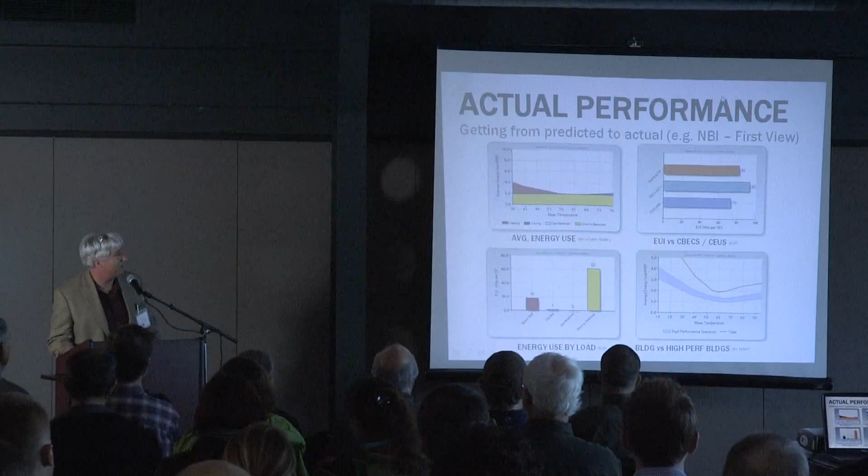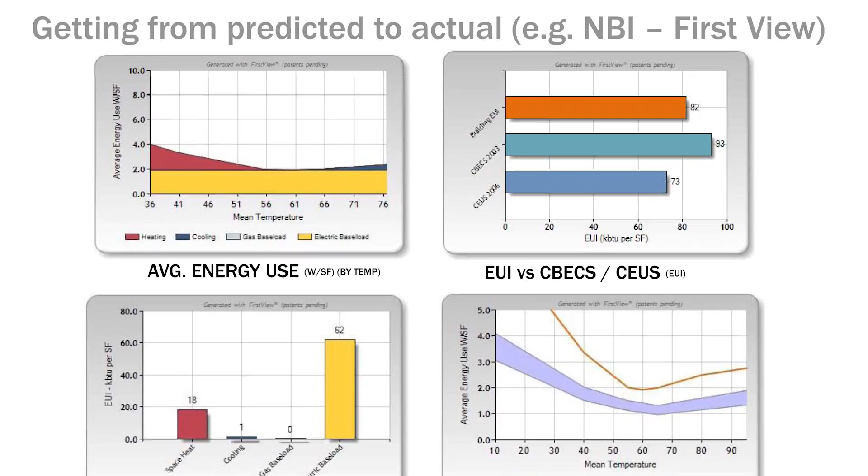But I will have a few slides about buildings today, only at the beginning, and then the rest will be about district systems. But I think much of what Margaret teed up has huge implications for our neighborhoods and our cities. And it all comes down to this, especially for the architects and the engineers, but actually for everyone that Mark had hands raised in the room. Actual performance is where things are going.

So there's a thing, but we really want to focus on this because to date, this isn't the way our codes are built. This isn't the way we're taught to design. We're not an outcome-based society yet. And yet this is actually what net zero performance and actual performance is.

The Living Building Challenge is an outcome-based green building standard. You don't even get to submit until you've demonstrated the building's actually performing the way you want it to. I want to make sure that the contractors, owners, engineers, and architects in the room are thinking about what will it mean 1 or 2 or 3 code cycles from now when the building codes are requiring us to demonstrate actual performance of our buildings.

That's where we're going. The draft codes are already written. I was just in DC a couple weeks ago working on a policy summit about how to make this happen. I want to make sure people leave here today realizing this is not a fanciful thing. Outcome-based codes is where things are going.

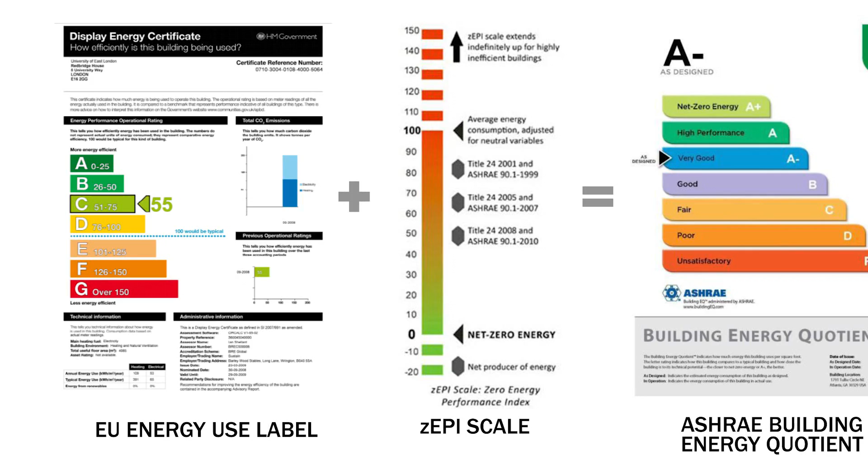There are systems out there. The one on the left is the European system about reporting building energy use. The one in the middle is NBI's zEPI scale. And the one on the right is ASHRAE's proposal, which I'm not going to give them a big grade for creativity, but it does look an awful lot like the European one.

These things are coming, and we're already starting to use them in those 5 cities, and now maybe 10 cities.

I'm only going to briefly talk about our living building project because Margaret did such a good job teeing things up, but there are some things we learned here that have real district scale and city scale implications. This is the living building project our firm's been working on in Portland for the last 4 years, which, unlike the Bullitt Center, is not going to be built. We found out through political chaos in Portland, it's officially dead. But that doesn't mean we didn't learn a lot working on it.

One interesting thing, which Margaret touched on, is the notion of dashboards. But what we're envisioning, which really moves to district scale, is the notion of fractal dashboards. We're going to need dashboards at city scale, so if you're driving by the building or on the web, anyone can find out how the buildings are doing against their goals. But as you walk into these buildings, you're going to want to know a lot more, and we're hoping to engage you a lot more.

This will be true at the Bullitt Center, where the building lobby will be a host of information for people. But remember, one of the key things Margaret talked about was that tenants have an energy budget and a water budget. Imagine what that lease looks like. Think about that. So you're going to want to walk into work and say, how are we doing?

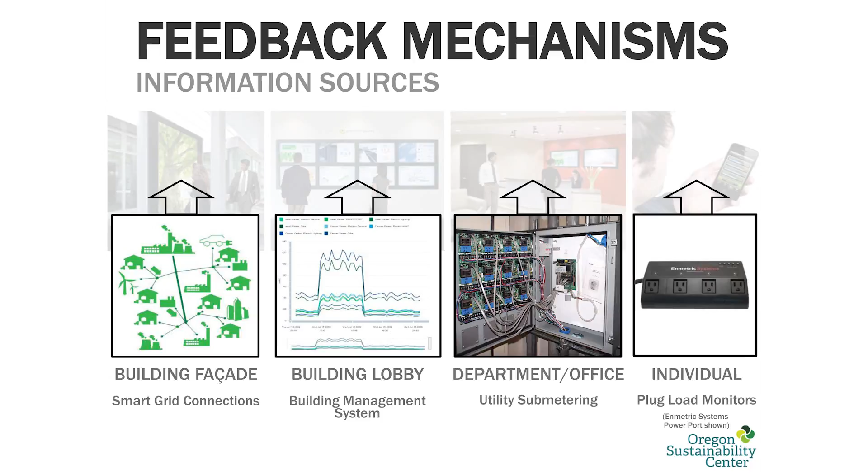Ultimately, we've got to get people engaged personally. The technology exists to do all of this; it just hasn't all been put together in a tidy way inside one building before. So we all owe a debt of gratitude to the Bullitt Foundation, Miller Hull, and PAE for the work they're doing. It is really, really groundbreaking.

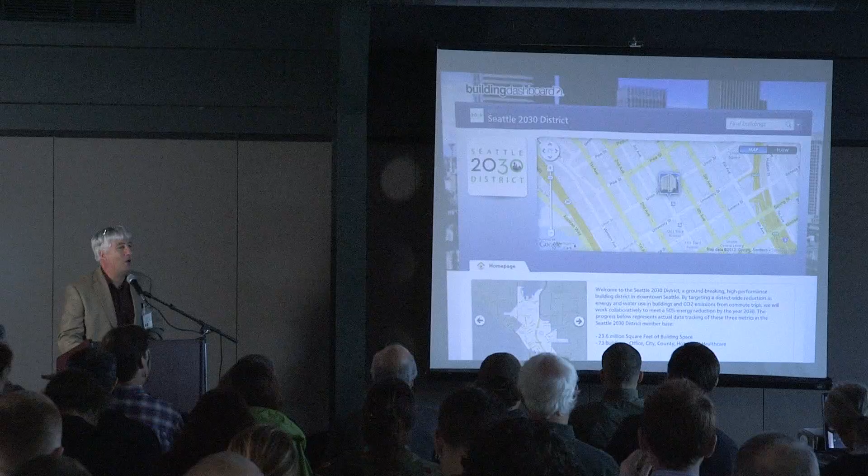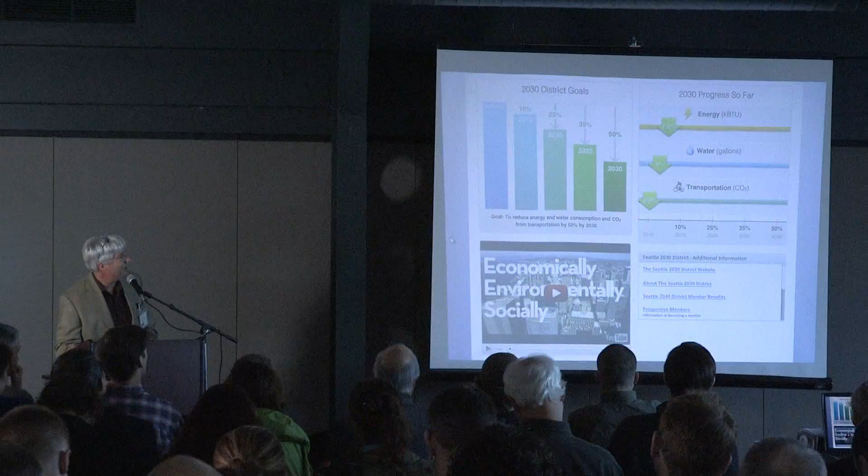So now let's move to district. The notion of an outcome-based district already exists, up in Seattle at the 2030 district. Some people think it's such a good idea that there are now 3 or 4 of these 2030 districts cropping up around the country. It's a whole group of businesses banding together and setting goals. The 2030 district wants to be 50% less carbon, less energy use, by the year 2030, I believe. And they've already got a website reporting how they're actually doing. I want to make sure everyone's aware, because I don't think the AIA is telling us this, and I don't think the code people are telling us this, that we're actually heading to this outcome-based world. So use that as a framework for the rest of my talk.

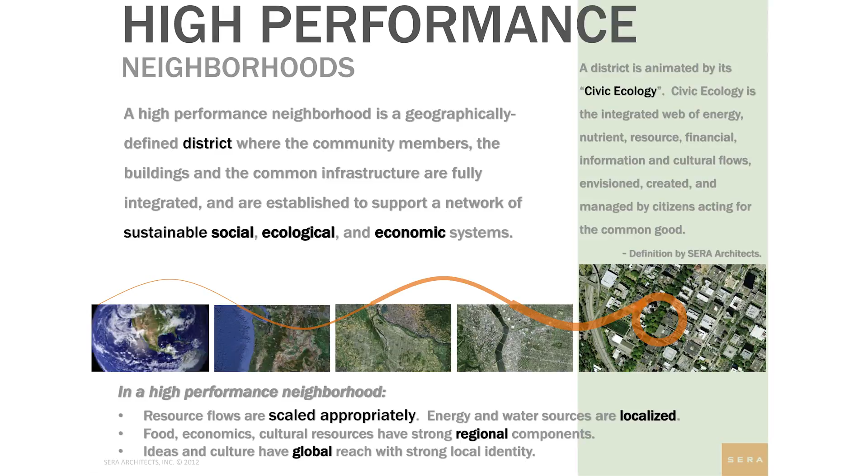Now I want to talk about high-performance neighborhoods, sometimes called eco-districts — we use those phrases interchangeably. It's important to note there's growing focus on our cities just in the last couple of years. The population in urban areas in America is now larger than the population in rural areas, and that hasn't been true since 1910. So it's a big, important trend. It's all about scale and resource flows — you're going to hear me talk about this over and over today — and regional components, getting a regional mentality, regional economies. There's a whole bunch of issues around regional economies tied to this, but it's still going to have a big global impact.

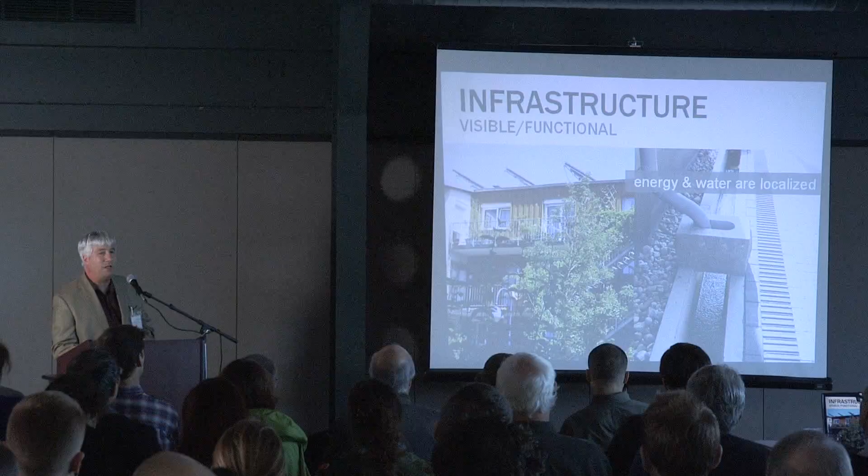I'm first going to do a review of some so-called eco-districts or high-performance neighborhoods that already exist. Unfortunately, all of the ones I'm going to show are outside the United States, but that's just the way things are — we're really close to starting to get some. This is Malmo, Sweden, pretty famous for a brand new district with all sorts of interesting things going on. I think what's quite interesting about district scale is that we're going to start to celebrate things we've been hiding for a long time. I actually got to speak at the Civil Engineering School at University of Washington earlier this year, and I was trying to convince both the faculty and the students that infrastructure is going to become sexy.

Mark my words, you heard it here. It's true, and it already is. We've been so busy trying to hide things and make things go away that we aren't celebrating things that are actually part of our place. Energy and water infrastructures are going to become more visible. We're going to get back to creating neighborhoods that really feel human scale.

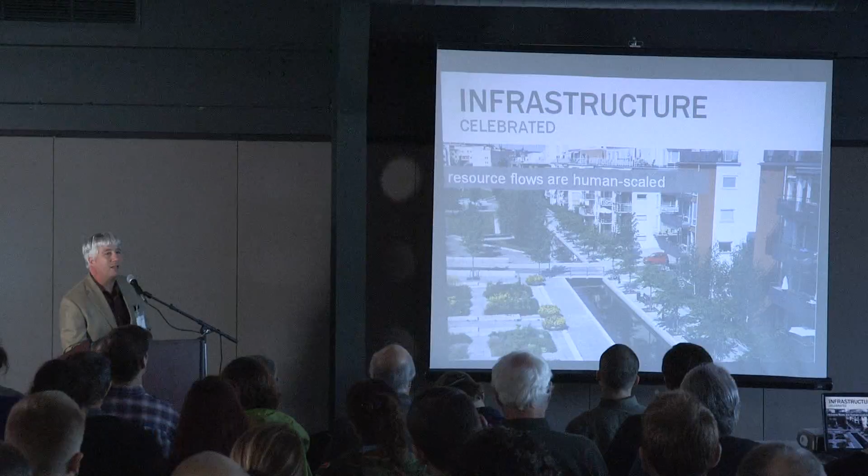We're going to get a lot better at mobility and mixed modal things, so it isn't all a car culture. This is already happening. I was just reading an article in Architectural Record about Oklahoma City completely reinventing their downtown transportation system. They're taking out all the one-way streets and turning them into two-way streets, and doing a number of things around this.

We're going to be remaking the urban, but we're also going to be remaking suburban infrastructure. So I think the remaking of suburbia is a huge job opportunity for a lot of people in the room, so just pay attention to that.

So let's also now go to Stockholm. Stockholm has Hammarby Sjöstad, and I've actually gotten to tour both of these places. Very interesting—this is much older, it's been there about 11 years. Now it's a very vibrant neighborhood, very, very successful.

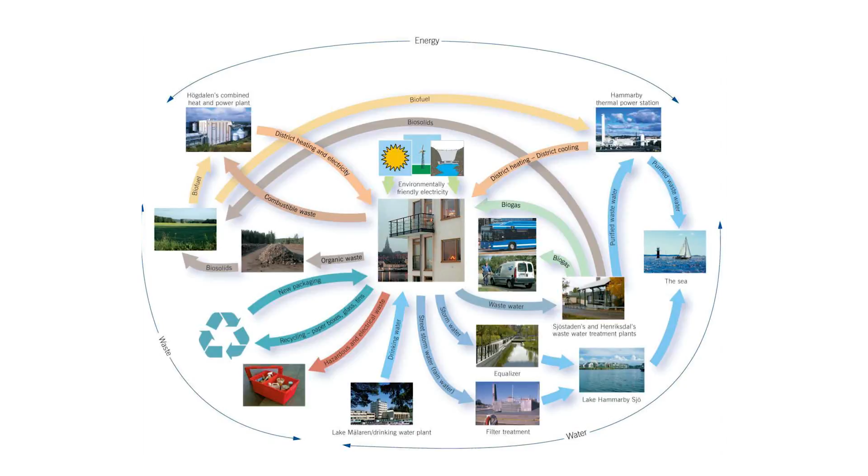This is their flow map of all the resources in and out of their community, and I think this is something we're going to see more and more of. What we want to do is start to close loops. If you think about most of our systems right now, they're one way in, one way out, whether you're talking about energy, water, or waste. If you were to draw the flow map for most cities right now, it's just lines of resources in, and lines of waste resources out. We're going to start closing all these loops.

In fact, I think there are even discussions of things like that here in Bellingham. But still getting this mouse figured out.

So one of the things they've done in Hammarby is close the waste system. They actually have a vacuum waste system that exists as infrastructure underneath the entire community. These are for different things—glass, plastics, organics, and so-called waste, whatever's left over. But it's all getting vacuum tubed to a central location, as you can see here.

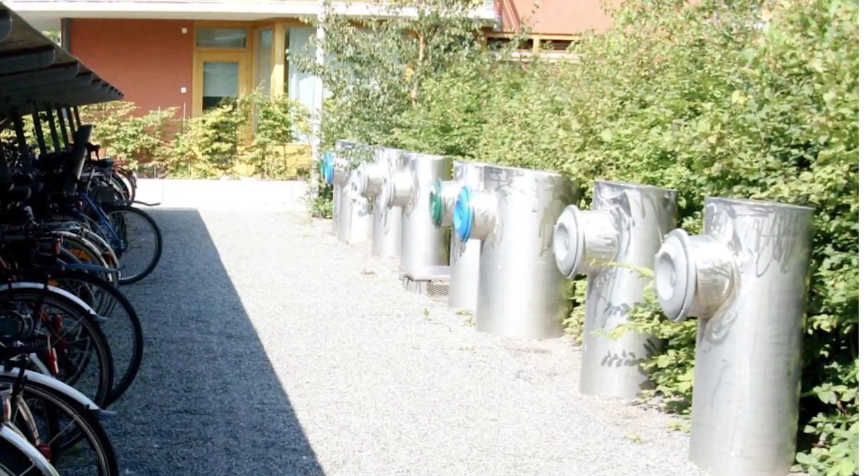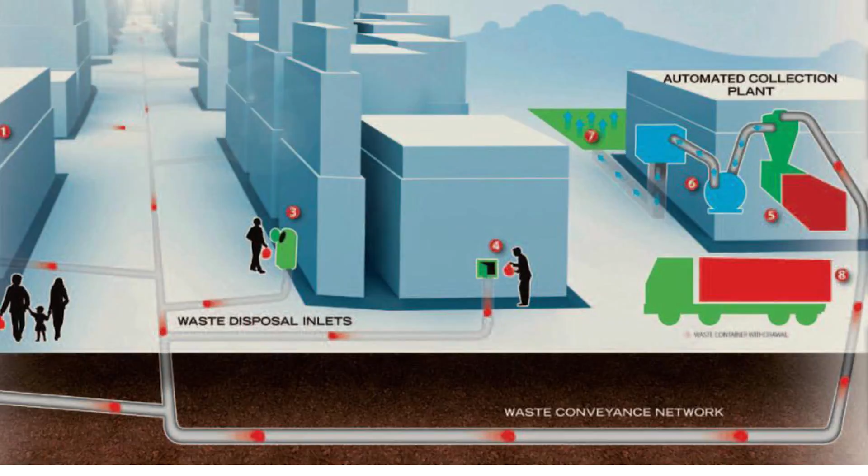I think we're still some years away in America from getting to this level of infrastructure, even though I am working on a project in the United States where we may be doing vacuum organics only. It's a much smaller, easier infrastructure to install, and there's a lot of real easy upside benefits that come out of that. But in Europe, it's not quite commonplace, but it's in many, many cities.

So one of the things it gets you to do is really start to optimize waste-to-energy systems. This is a waste-to-energy plant just outside Stockholm—and when I say just outside, I mean like 2 miles outside downtown Stockholm. This has not been pushed out to the periphery, it's not been hidden away like so many of our energy plants. It's right basically in downtown, and it's a very pristine place.

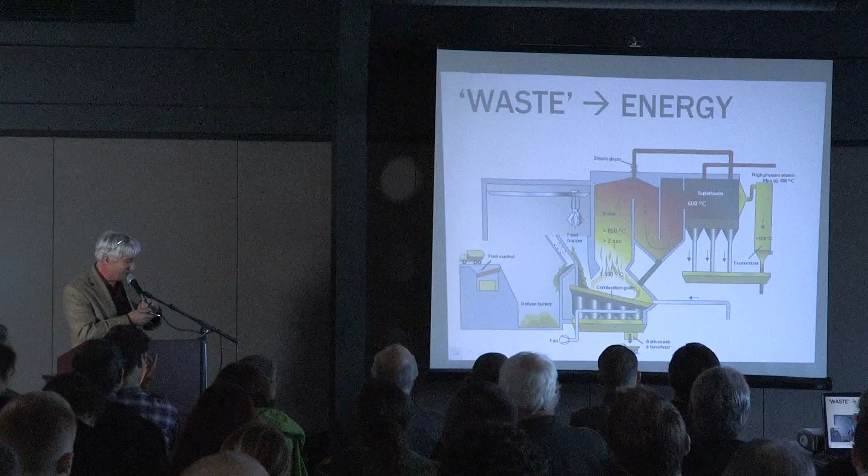Here I want to draw your attention, because it's an interesting kind of big diagram until you see the size of a big semi-truck. This is a really big system.

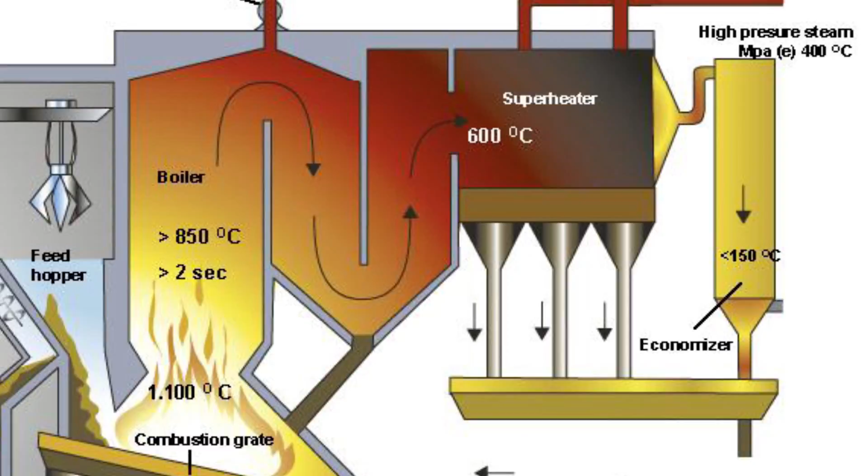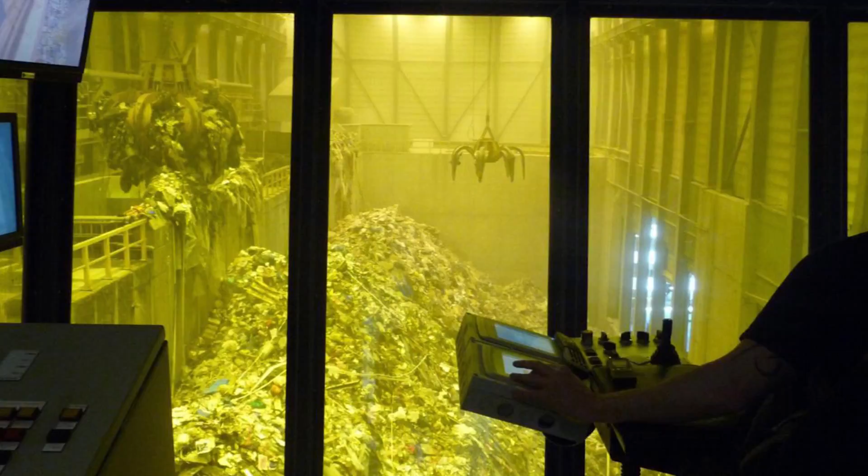This is what it looks like to be that operator that's feeding the fire, as it were. But that's how they're making their energy, how they're making their electricity, and how they're dealing with their waste. We could have a really robust discussion about whether we like that or not, but it is working for them, and their carbon neutrality numbers are some of the lowest in the world. Stockholm is either number 1 or number 2 in the whole world for lowest carbon footprint in cities.

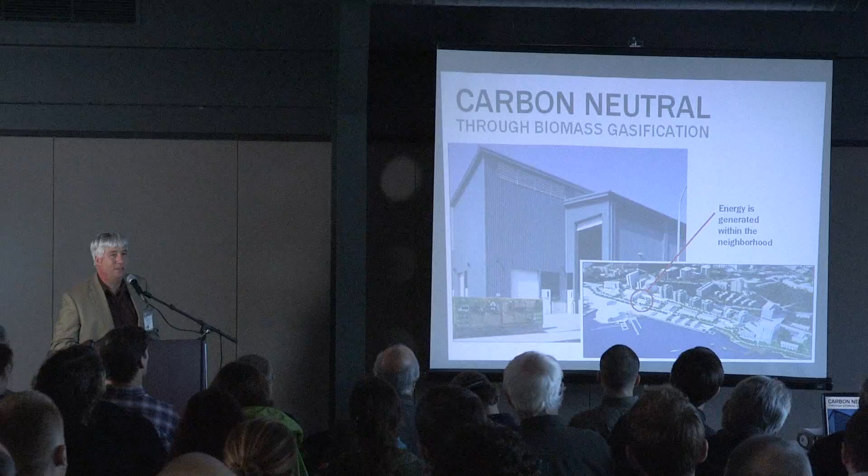And their district energy plant is literally in the neighborhood. It is in Dockside Green. And they've got a biomass gasification plant that is within sight of all of the units.

So doing cogeneration. For people in the audience who may not know what that is, cogeneration is the burning of something—lots of different things can be burned—for heat, which then turns turbines that make electricity, and the waste heat that comes off of that can then be transferred into any variety of heating systems, whether it's steam, but much more these days it's low temperature hot water.

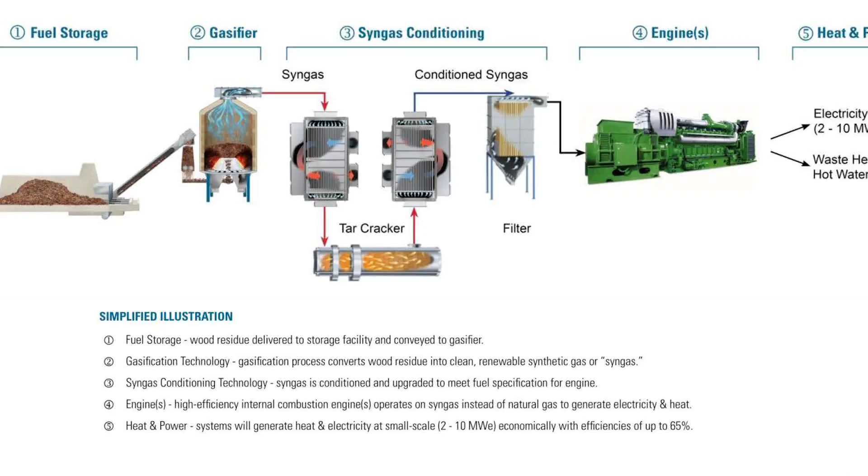Here's how their system works. They're using wood chips from the region, something a lot of us are plentiful here in the Pacific Northwest. They've got a very public display about this. Everyone in the community understands how the system works. They actually understand where their energy comes from, which is, again, something else we've lost.

And now I'm going to shift from city scale or big neighborhood scale down to campuses. Universities, I think, are actually going to be a real proving ground. I believe there's some Western Washington folks in the audience here, and I think this will be true for a lot of universities. They're going to be a proving ground partly out of necessity with some real big deferred maintenance costs around very old infrastructure, but also because, unlike cities and neighborhoods, they control all of their land. They even usually control their streets. So they have a lot more flexibility to reinvent their infrastructure quickly when it makes sense for them, than cities would have, with a little more complexity in cutting those deals.

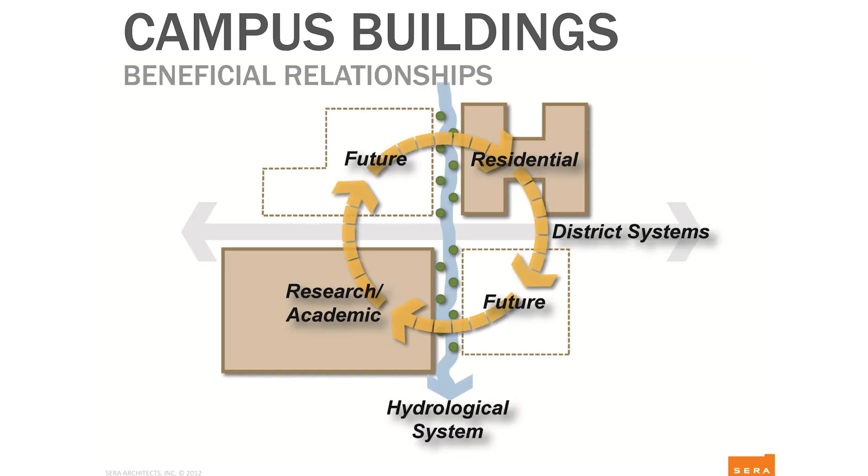So one of the interesting things—and we've seen it in university work, but this is absolutely analogous back into cities—is that if we start to co-locate residential next to either classrooms or offices, these two uses, residential versus classroom or office, peak at almost exactly opposite times, both in terms of energy and water. And this is really interesting.

It has huge implications for zoning, both for campuses and for cities, because we've been in the habit, even very recently, of segregating a bunch of housing in one place and all the offices somewhere else, even though everyone, especially these days, is thinking that mixed-use living, live-work, is really where we want to go. We've been segregating these systems. If we start to integrate them again, we're going to find a lot of efficiencies come in energy and water.

A great specific case in point: we did an analysis for the University of Washington and found that one dorm, about 300 beds, doing one shower cycle for one morning, fills a relatively small tank—especially compared to the size of the tanks living buildings have been doing, maybe a 5 or 10,000 gallon tank. That will flush toilets for 5 different classroom buildings in one day. It's a very closed loop system, very integrated, very low cost infrastructure, as long as they're close to each other. As soon as they're not close to each other, it's not going to make any sense to do.

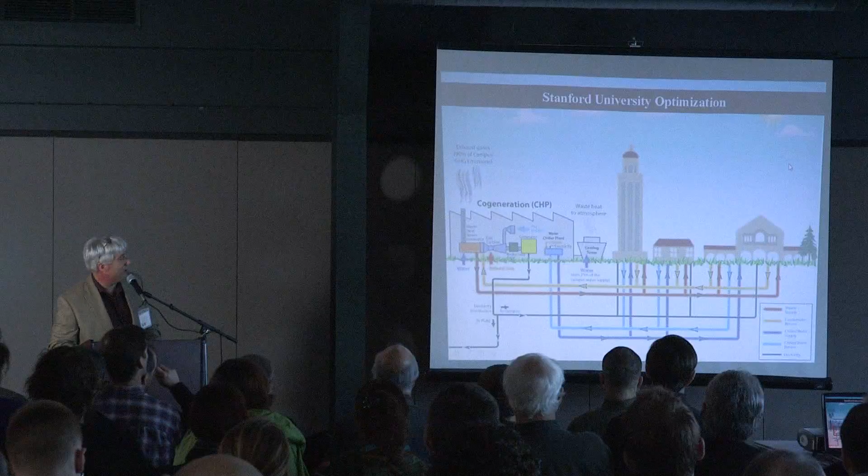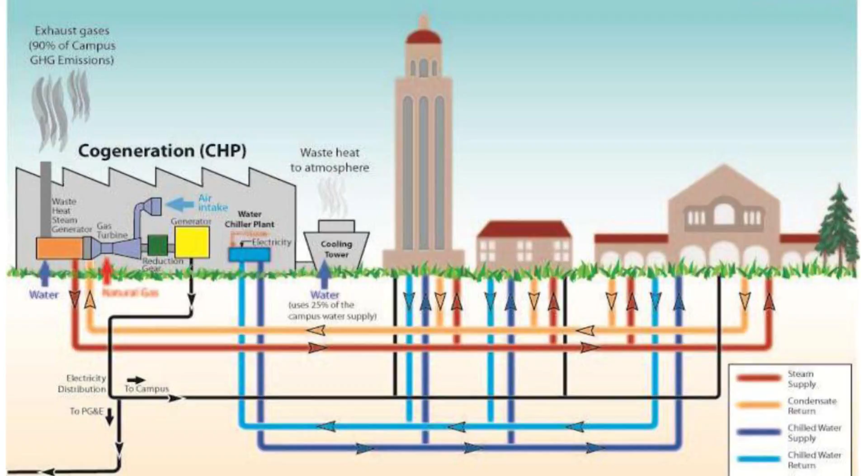Same things are happening in energy—they're peaking at different times. Another university getting into this in a big way is Stanford. Stanford's doing it on the energy side. They have, like many universities, a legacy steam system in tunnels throughout the campus—easy to maintain because everything's centralized, but very, very inefficient.

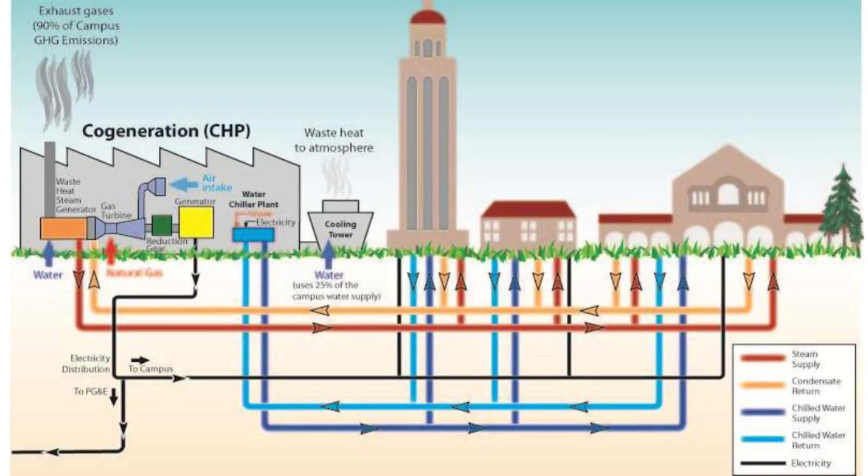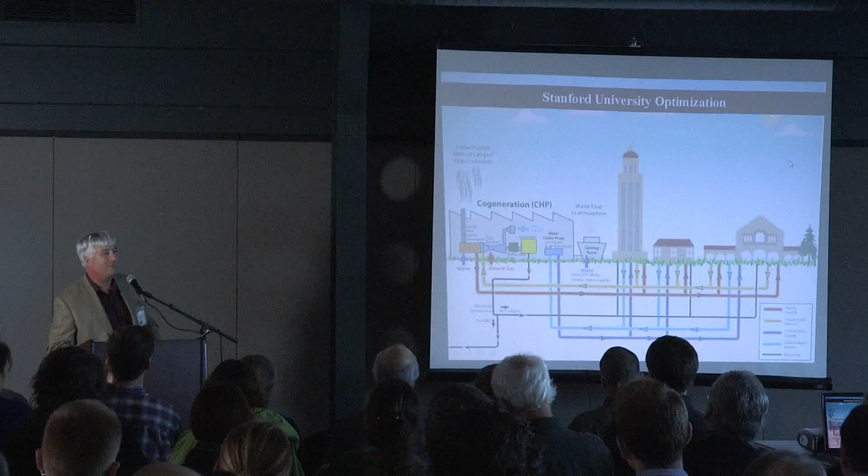And so they're changing to a low temperature system, shifting down to—and when I say low temperature, we're moving into 120 to 160 degrees, but it's actually hot water. And low temperature cooling, instead of right at 40 degrees, it might be more like 60 degrees. So they're shifting from cold chilled water and hot steam to low temperature hot water and not very cold water. Huge implications for them.

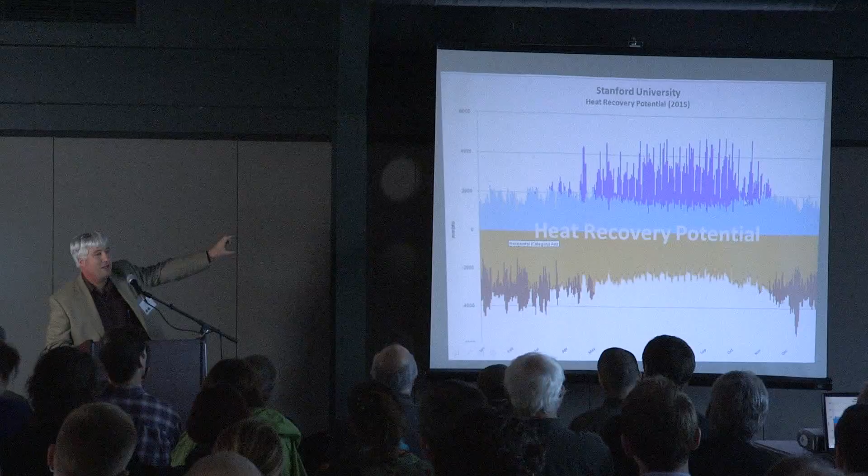This is actually how most buildings in the entire country work right now. Any building with VAV boxes and reheat coils, people are turning the thermostats up or down. The machines aren't quite sure what to do, so they pull in really cool air and then reheat that air using hot water or other systems, just to get it to be exactly 72 degrees all the time. There's a tremendous amount of inefficiency here, or if you're an engineer, a lot of low-hanging fruit.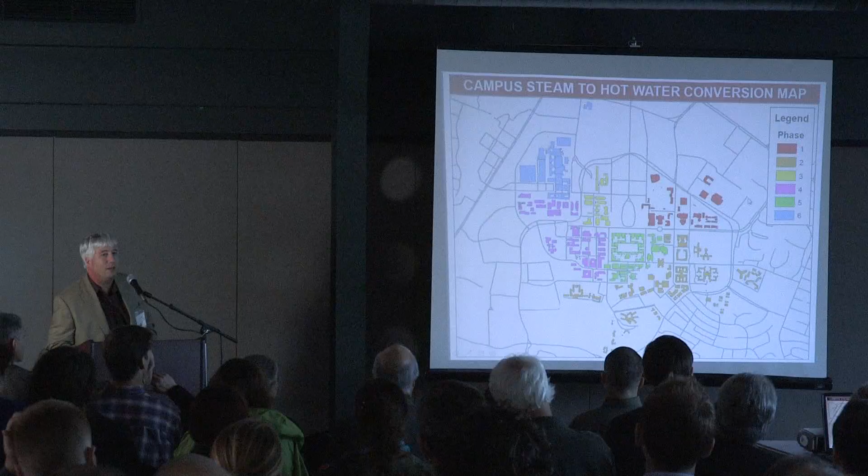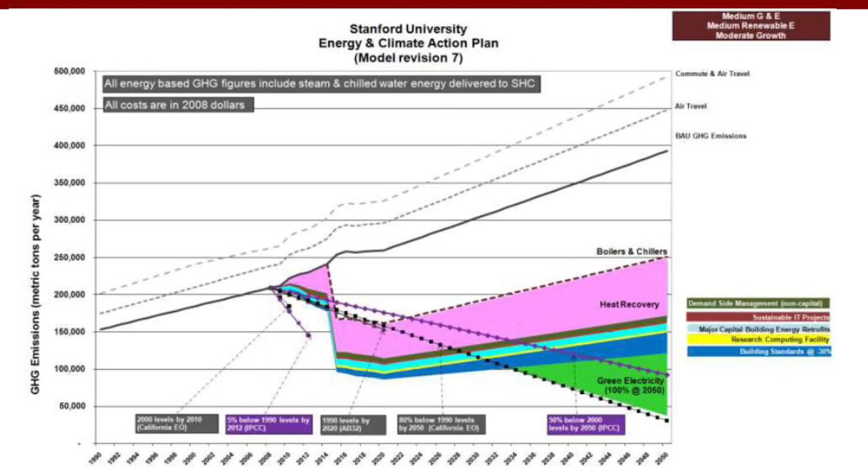It's a big project with 6 phases, stretching out over 20 years, but they're in the middle of phase 1 right now. It's a big shift. We won't get into all the intricacies of this graph, but the dark black line is business as usual energy use and costs, and this is what's happening as they institute the new system. The big number here is $639 million in savings over business as usual, not to mention they're going to meet and eventually break their carbon targets. They're part of the President's Challenge, as most universities are, trying to get to carbon neutral campuses, and this was one of the biggest moves they could make.

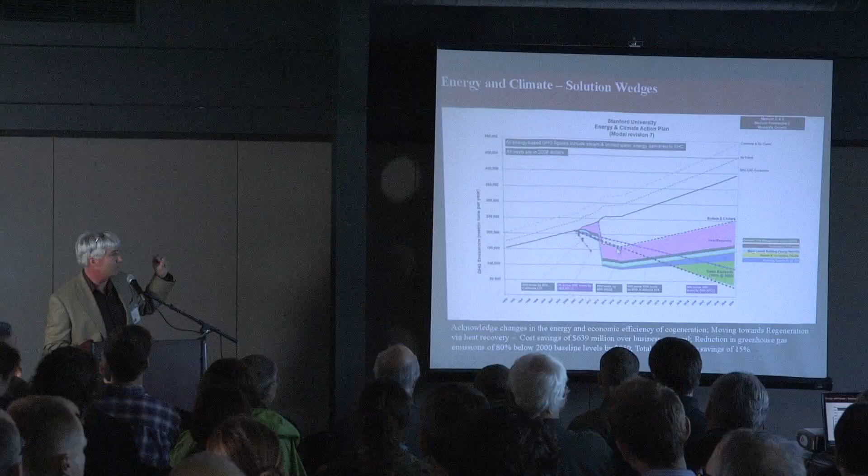So if there's only a couple things you take away from my talk today, I'd like them to be these: as a long-time green building architect, I am now a recovering architect, because when you start to work at district systems, you find some really interesting things. The first is that for the last 15 years, I've spent a tremendous amount of energy and brain damage trying to optimize energy, water, and waste system flows within the arbitrary boundaries of a building, only to find that energy, water, and waste all optimize at a scale bigger than a building. So hold on to that thought.

The second one is, as soon as you start to think about that, the first thing we wanted to do in the Portland Eco District movement was go find a few blocks, get some like-minded owners, draw a boundary around those blocks, and then declare victory and say we're going to make them net zero. But I can tell you that energy, water, and waste don't optimize at the same scale. So if they all optimize at a scale bigger than a building, and none of them optimize at the same scale, life just got really interesting.

Now you can do it at the scale of a building, as the Bullitt Center proves, and it's really important that we get some living buildings showing that. It's going to be a lot easier to have living buildings when we start connecting them to district systems. So it's really important that we prove up these cases, but then it's going to be a lot more important that we start realizing these systems optimize at bigger scales.

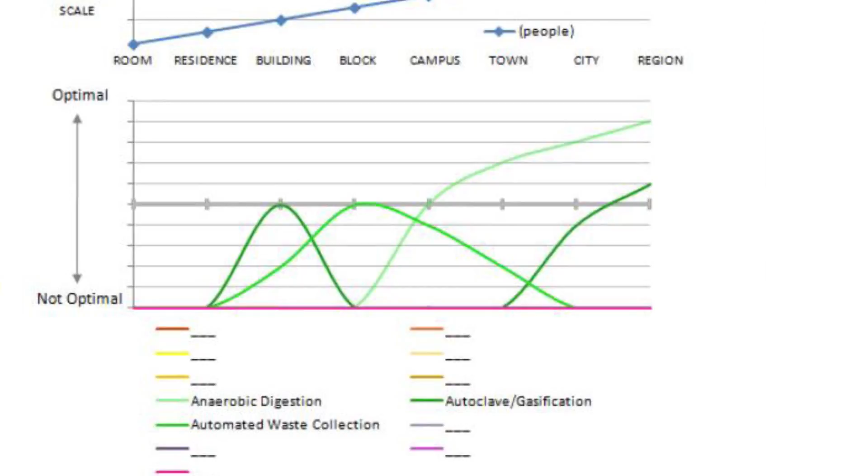What you want to do is start asking yourselves, at what scale do these different systems optimize? For example, for the project we were working on, anaerobic digestion—taking organics, turning them into synthetic gas, then using that biogas to do cogeneration—doesn't even begin to optimize until block or campus scale. But once you start that system and invest in it, it's very likely to deliver more and more positive returns up to the scale of a city or even a region. So that's just one example.

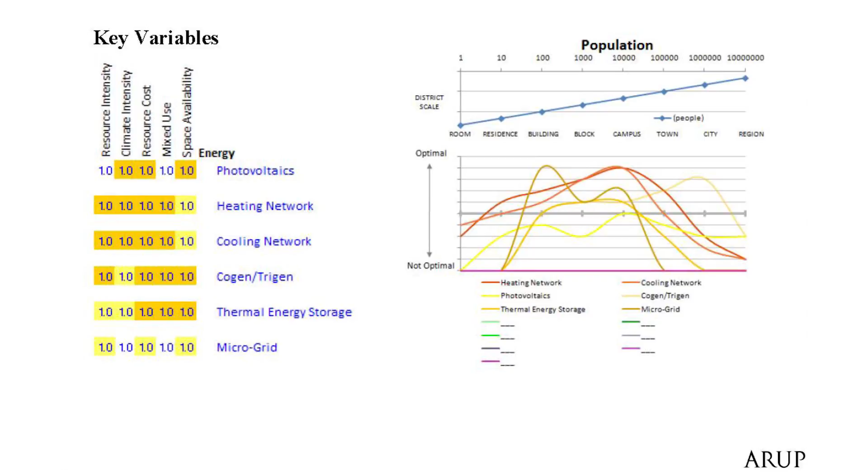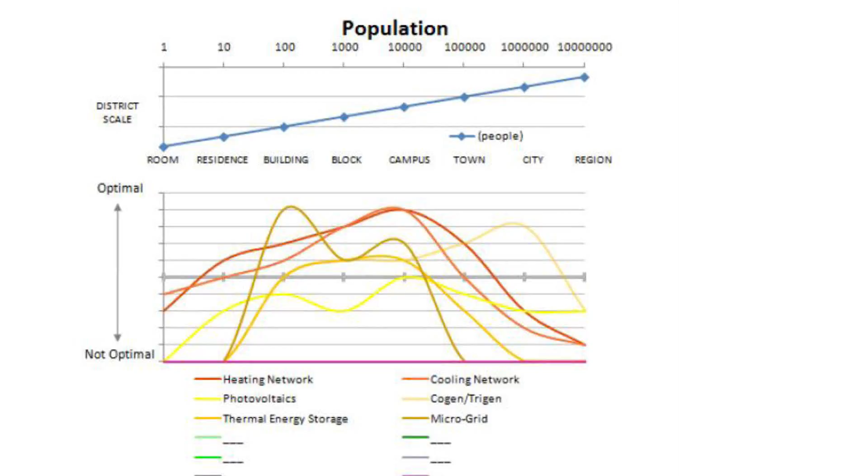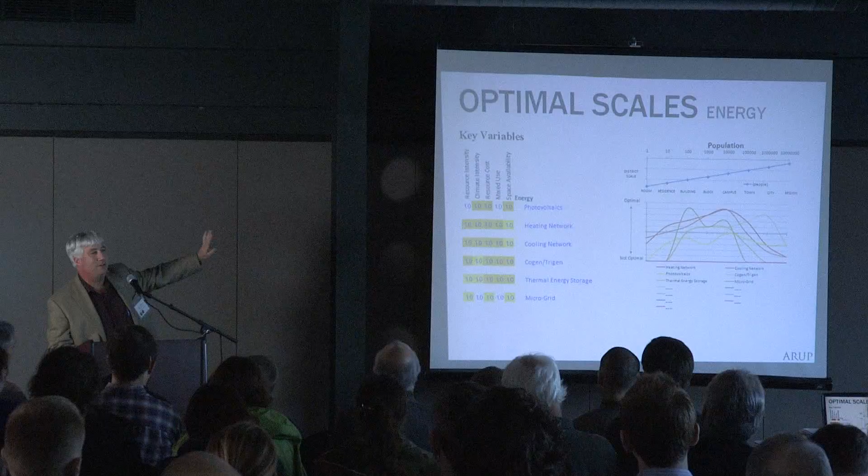If we go to other energy systems, it's really interesting to see how many don't even begin to make sense until you get to building or block scale. At campus scale, things really start to hum, but once you get bigger than a campus, many systems drop off precipitously in terms of efficiency. Some of this has to do with infrastructure costs and a variety of things, but again, it varies—this was done for a very specific project. It's the thinking in these slides that I want you to worry about, not the actual apparent answers.

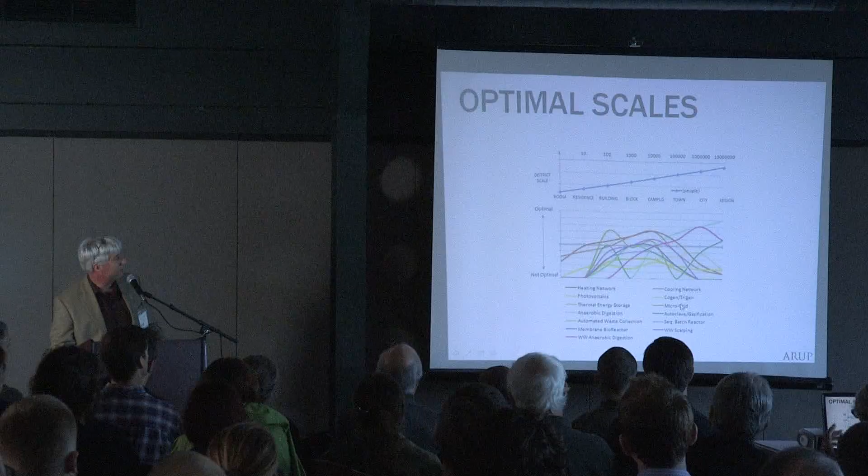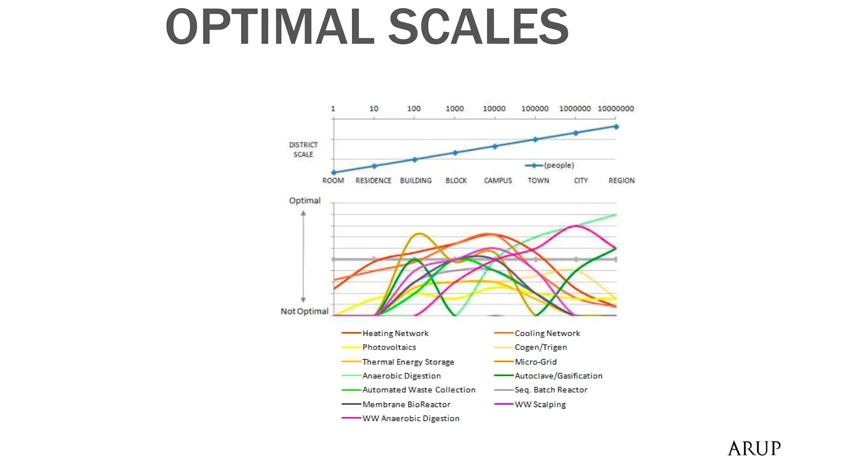We finally call this the spaghetti diagram. There's not a lot you can glean from this, except maybe you start to look at this campus zone and realize something's going on at that small neighborhood, district, campus scale that's pretty interesting.

So many of you probably know that Portland's been involved in an eco-district initiative over the last 5 years. I've been co-chair of the technical advisory committee and involved with that. Bellingham held an Eco-Districts Institute, an intensive for 10 or 11 cities selected this year in the spring, and Bellingham was a participant. Portland, Guadalajara Mexico, Mountain View California, Philadelphia, a variety of cities came in for 3 days. Cities and private entities worked on ways to really get eco-districts going. So that's a big part of what POSI's doing.

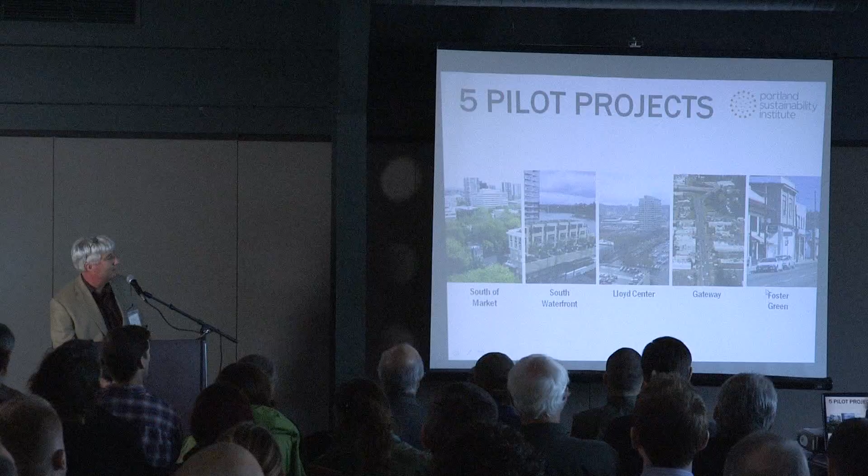We've got 5 pilots in Portland. If you know Portland at all, these are 5 very different neighborhoods by design. They were selected because they're so different. Everything from South of Market, which is the kind of new hip name for the university district at Portland State University—it's intentional, they wanted to rename it that way because they wanted to make sure it wasn't just about the university, it was about the university being part of downtown Portland. South Waterfront is the new Point Tower, new development, actually reminiscent of Vancouver BC in a lot of ways. Lloyd Center is an established business district with a bunch of surface parking, really kind of a classic American downtown business district. And then Gateway and Foster Green are both depressed residential areas, lots of single family homes. Foster Green, I think, has over 80 languages spoken in their schools, just 5 miles from downtown Portland.

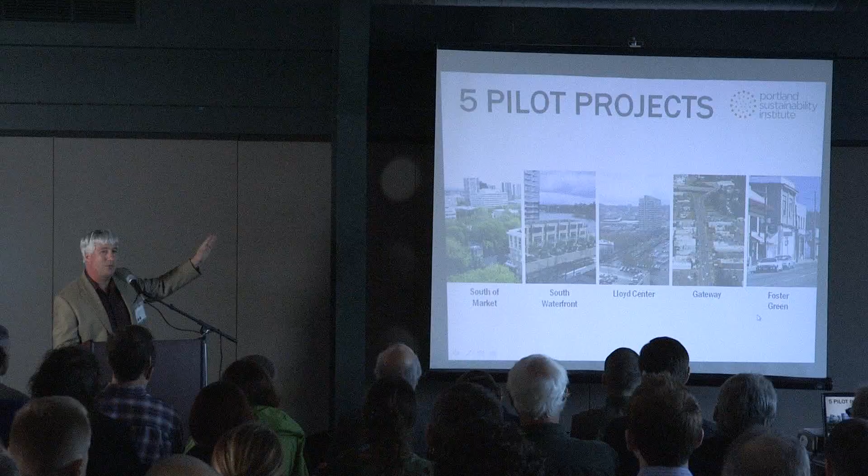So very, very different. What does an eco-district mean to each of these places? Well, it's probably not surprising, it means something different to every single one.

POSI's worked really hard over the last years to create a toolkit. You can download this, and again the slides will be made available, so you don't need to try and copy down these long URLs that'll be on my slides.

So just think about that. So for the rest of the day today, when I talk about hardware and software, I'm thinking infrastructure, buildings versus people systems.

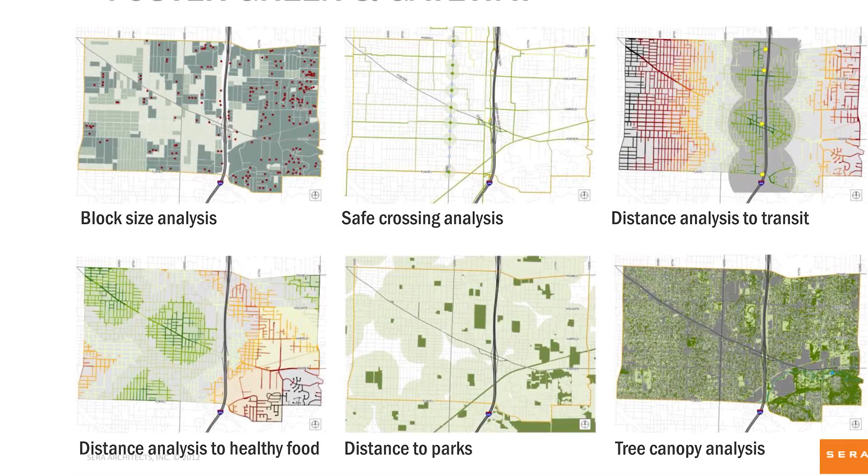We got to do the first district assessment of the Foster Green and Gateway districts in Portland, and did lots of interesting analyses. These are only 6 maps we created, but we mapped all sorts of interesting things. One that really was interesting to us is the block size analysis. The blocks in Foster Green aren't huge by most city standards, but in Portland standards they're enormous, because Portland, if any of you have been there, has really small blocks, 200 feet on a side, which makes it very walkable and really changes the whole character of that city. Just 5 miles away in Gateway, they've got blocks that are 300, 400, even 600 feet on an edge, and they're wondering why they can't get robust, walkable communities and development to happen.

So one of the first things to do is the remaking of suburbia—that's where this gets filed. A lot of interesting work in these maps. In fact PSU, a big partner in the eco-district effort, has mapped things like benzene levels across the entire city, and not surprisingly they're really high near the freeways. But if you start looking at which neighborhoods are next to those freeways, there's some inequity there that's pretty obvious when you start to map where the city is more toxic and less toxic.

So just a couple slides on civic ecology. This is a construct that we've come up with, but anyone can do it. It's just a name we've created, but it's really about community scale mapping of what your community decides it needs and wants to make happen. It's a bottom-up approach.

The whole notion is that civic is something we think we may have been forgetting about in our society. If you go back to the original notion around outcome-based buildings and outcome-based communities, we need to get people involved, to become participants in their environments again. Right now we have such a passive contract.

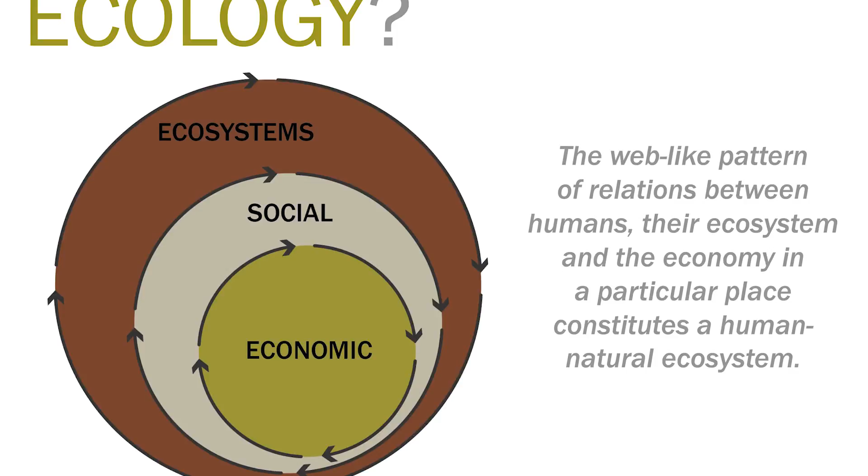And the way our economics are built right now, our economic models all say it's the other way, and they externalize all these other things. So we're going to have to get back to understanding that we're civic participants in society, and that we are a subset of the natural systems for all of this to work.

The other thing about the way we think communities are going to evolve: we've always been learning communities, but especially in the era of cheap energy since the 50s, through all these passive contracts in our built environment, we've stopped imagining learning environments. Things are going to constantly improve and change, and we should probably start designing them to work that way, so we're much more nimble as we get more and more constrained.

So when we do civic ecology exercises, we get community members to map their system flows, just like that Hammarby map I showed earlier. It's really interesting — you can get any citizen in any community to walk in a room, sit down at a table, and do this in an hour. They know where their energy comes from.

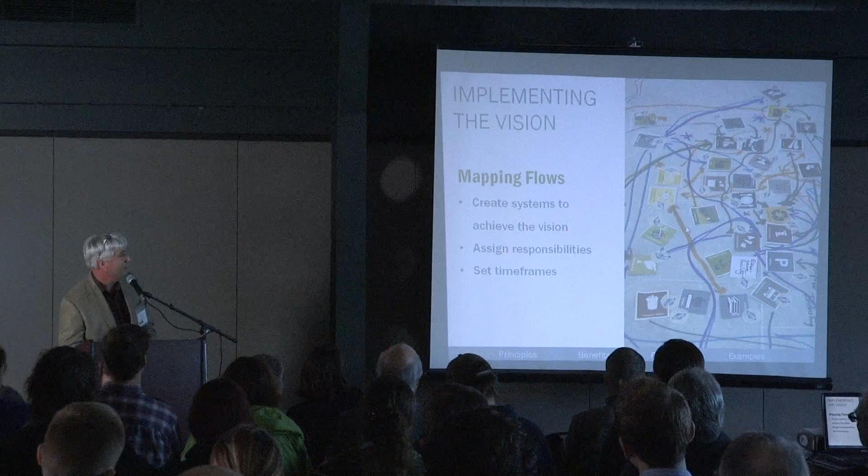They know where their waste goes. They know where their water comes from. They know kind of where the economic flows are in their community. You just need to ask them. It's a really, really interesting exercise.

And if you want to learn more about it, there's actually a book written by PSU, and my partner Tim Smith has written it. But all of this is tied to that soft system side — we're really going to want to work the soft systems at the same time that we're developing new infrastructure.

But now we're going to go to infrastructure. So a couple thought experiments, and then my talk will be done. The first one: I got to work on a small team doing infrastructure master planning for University of Washington. We were given more free rein than usual, and asked what the UW should be thinking about if we're 30 or 40 years out and want to meet or exceed the president's climate commitment.

We want to get to net zero carbon, so we started looking at that. One of the interesting things for them is they have this amazing location right there on the lake that already abuts a bunch of beautiful wetlands.

Well, it turns out constructed wetlands are really, really high quality, low energy wastewater treatment systems, if you only want to use them that way. And they've got a robust research university doing a lot of work in public health, a lot of work also in the biosciences, and a really, really strong engineering school.

So if you start to put those together and follow this new trend of universities going multidisciplinary and cross-disciplinary, you could start to have those colleges collaborate on a system that treats water, reclaims that water, and creates a purple water, or reclaimed water district, that's then used within the campus.

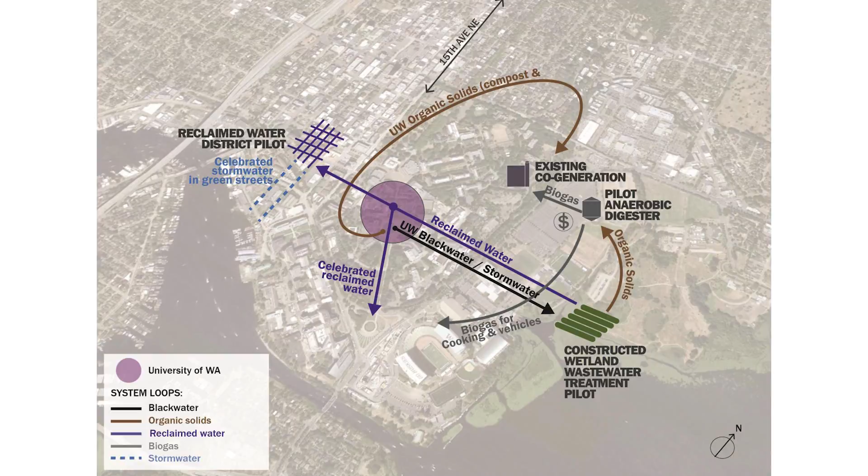They're expanding to this area west of 15th rapidly. And they were actually, as we did this experiment, in the process of final construction documents on 5 dorm buildings — Chris, is that right? And they were all going for green building standards.

I think LEED Gold might have been their target, but they hadn't thought about this system. And that earlier slide I showed of housing next to classrooms — huge synergies around reclaimed water use and gray water use.

So they actually stopped the dorm projects, held a one-day charrette, brought in all the different design teams who were really open and willing to participate, and then got gray water systems put into that project, because you can't add purple pipe or reclaimed water systems into a building cost effectively after you've already built it. Chris Webb, who's in the audience, participated in that.

It was great fun. But you can also start to see that a wastewater system creates organic solids, which we could also link to yard debris and other organic waste, because all of our communities now in the Northwest do curbside organics collection. Through organic biodigestion or something like that, you could take it to their existing cogen plant. Right now they just have a gas cogen plant, but you could create biogas, which creates dollars, which creates energy, and start to close this loop.

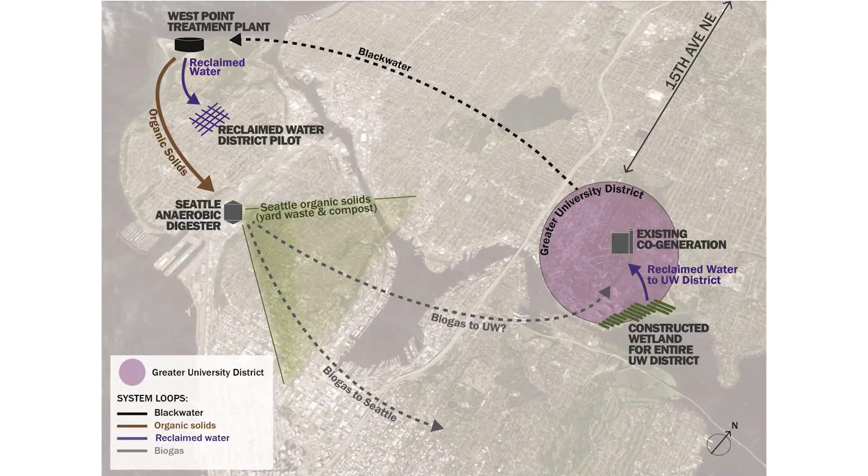But all of these systems, some of them only kind of optimize at campus scale, and some actually are quite good at campus scale. We were thinking the big advantage to this whole piece is that if they can prove these systems up and demonstrate meaningful ROIs, really find out where all the kinks in the system are, they could take these technologies they develop, hand it back over to the city of Seattle, and really take some of these systems to scale.

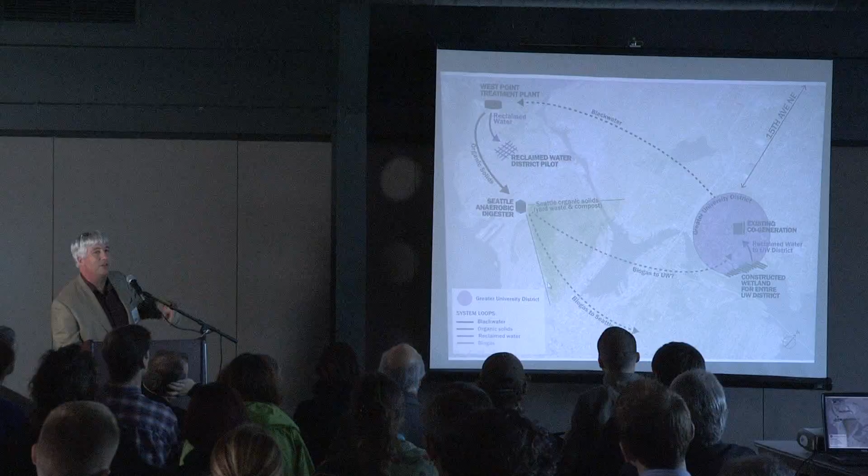It's a very place-based solution. It's going to look different in different cities with different infrastructures, but this is interesting. So now if we move closer to my neck of the woods in Portland.

I don't know how many of you are familiar with Bill Reed of Regenesis, but he's famous for saying that the first meaningful metric size, if you're doing a sustainability analysis, is a watershed. The watershed is the first size at which we can start to analyze systems in a meaningful way. And I find it very interesting.

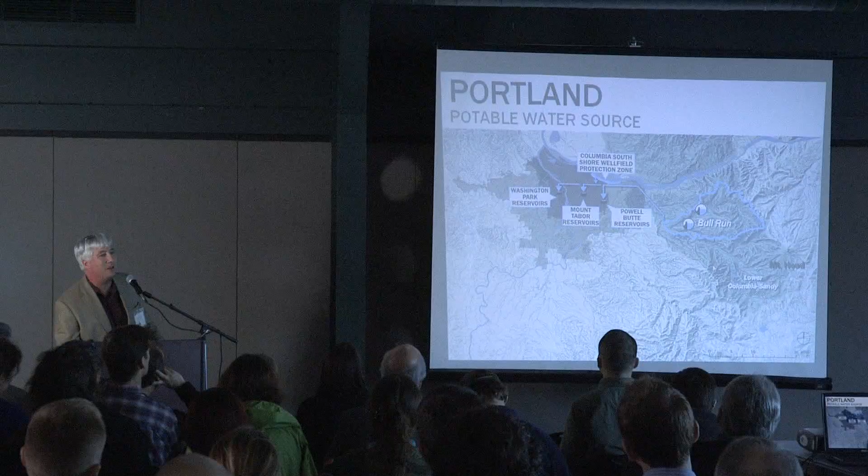And it's not even really a watershed. It's a human construct with 2 dams. That's part of one smaller watershed. So this is how the Bull Run works - these 2 dams are quite high up. And what's interesting about that is that it means that we've got gravity-fed, pristine water.

Very similar to New York's system as well, and a lot of Pacific Northwest communities. But most everywhere else in America does not have this. I just spent 9 days in New Orleans, which is pulling water out of the Mississippi right at New Orleans, the base of a third of America's population and farmland that's all dumping into the Mississippi.

And New Orleans pulls it out, treats it, drinks it, poops in it, pees in it, and then puts it back in the river one more time before it goes in the Gulf. So this is a really excellent water system. I'm not a big fan of dams, but they're there now.

What's interesting about how it is, because we've got such elevational gain, is that we can gravity feed it into cisterns that are actually on hills inside Portland, and then those are gravity feeding the potable water system within Portland. So this is very low energy, very resilient. It has great long-term capability if we don't keep wasting our water.

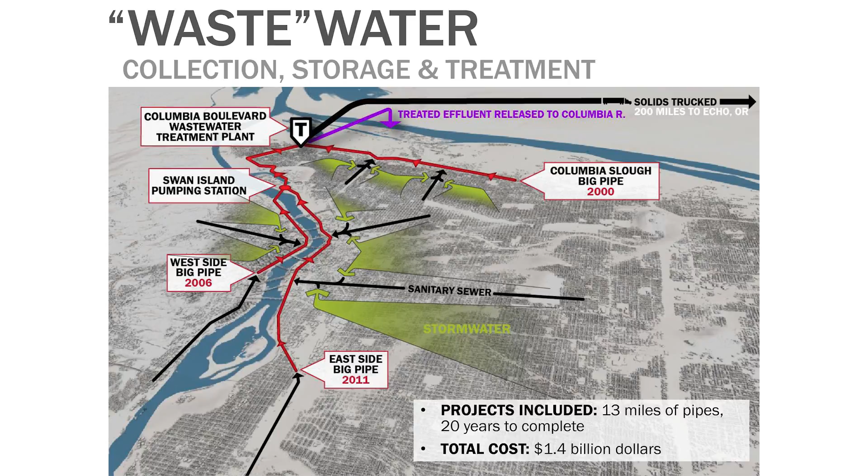13 miles of pipes, 20 years to complete, $1.4 billion. And all of this feeds to one waste treatment plant, which treats water to some legal level and returns it back into the river. Remember this whole notion of single use. And we take all our organic solids - high value organic solids - and truck them using fossil fuels 200 miles and lay them on grazing land. $1.4 billion, 20-year debt for this system.

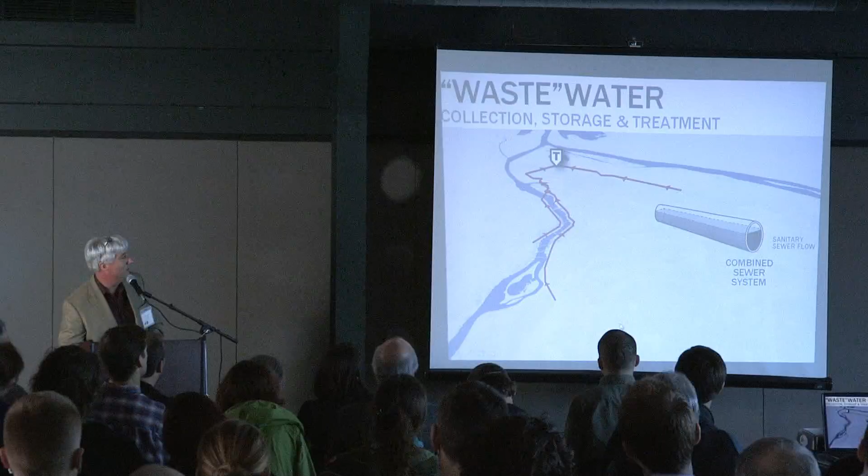So now let's review the system. Here's how it used to work 10 years ago. We had a combined sewer system which would get a variety of scale of stormwater surges during our plentiful rain all winter. 50 times a year we would get a CSO event into the river, which is what the EPA had a problem with, and they said you've got to solve that. So we created the big pipe.

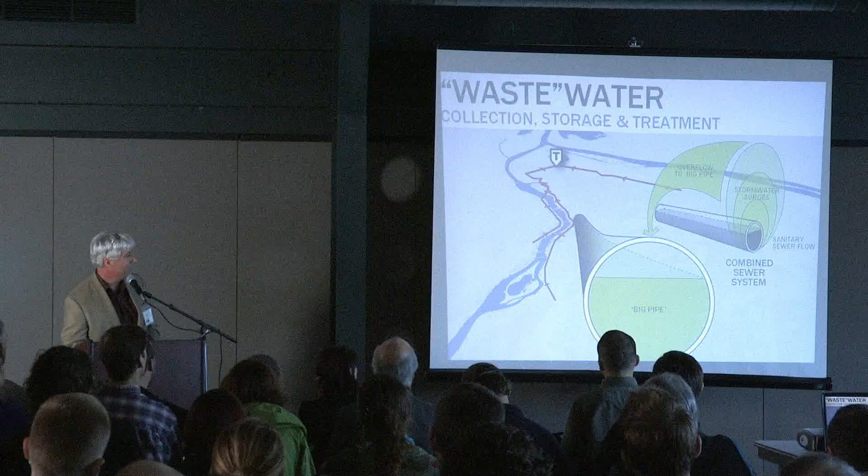This big pipe is as much as 22 feet in diameter. It isn't really a pipe - it's really an underground reservoir masquerading as a pipe that feeds sanitary sewage at a controlled rate to the wastewater treatment plant. And here's the kicker: it still overflows 4 times a year. And that's legal. We designed it 20 years ago for $1.4 billion to still legally overflow into the river 4 times a year. Is that the way you want your public's money spent? Is this completely nuts? It makes me completely crazy.

So, which is why we created this slide. We haven't been paid to do this - our firm created this slide deck because we just elected a new mayor 2 days ago. He happens to be an infrastructure guy, and I want to show this to him and get him thinking about other ways we might spend $1.4 billion of our leveraged public money.

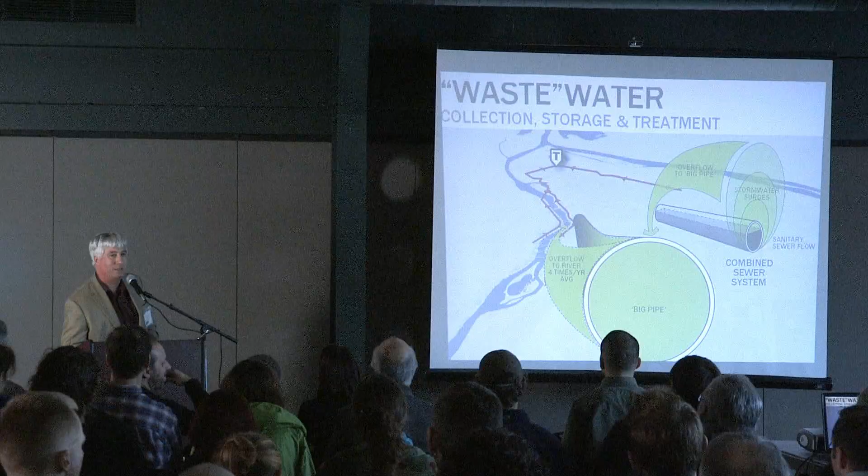There's the pipe - that's a truck inside the pipe. We've had an 83% rise in water rates, and we're not done - we expect another 50% in the next 5 years. I don't think things are that different up here in Seattle. I don't know the numbers, but I think all of our systems use the same basic structure.

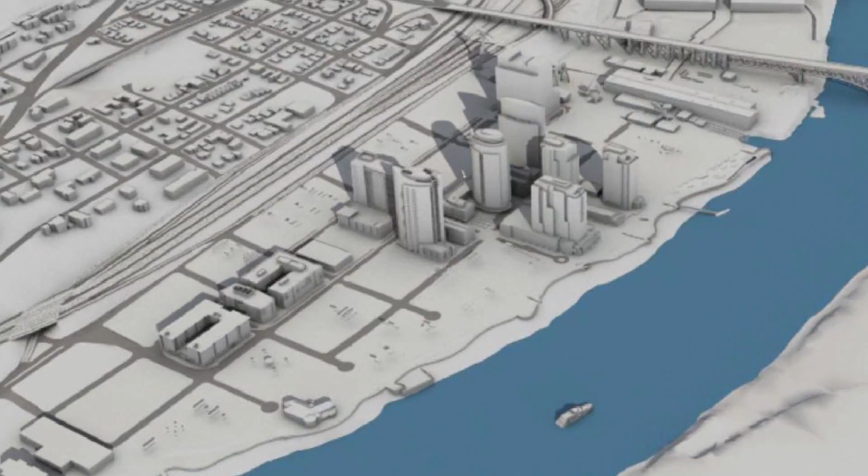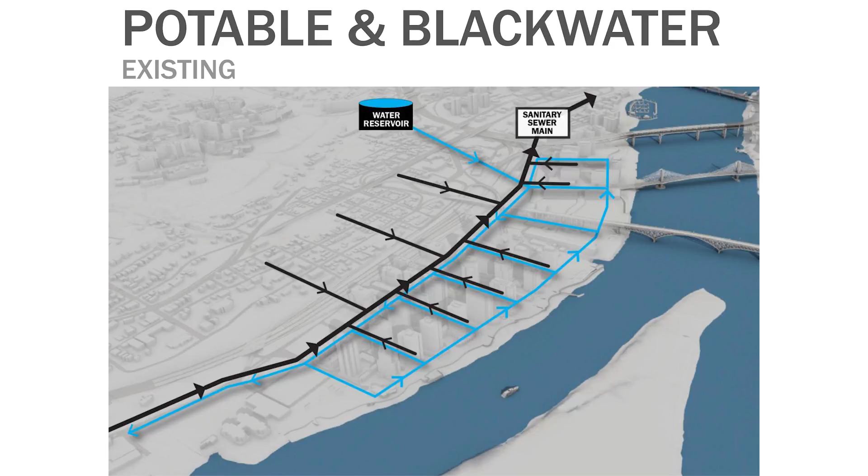So now let's imagine how we might do it differently. If I gave us all $1.4 billion today, and we were looking out 20 or 30 years, what do we want to do? Let's go down and look at that new South Waterfront District. Those are the buildings that are built right now, these are the ones imagined to be built. This is today's existing infrastructure - I will now call that yesterday's infrastructure: potable water in, sanitary sewer out, with some stormwater systems in it.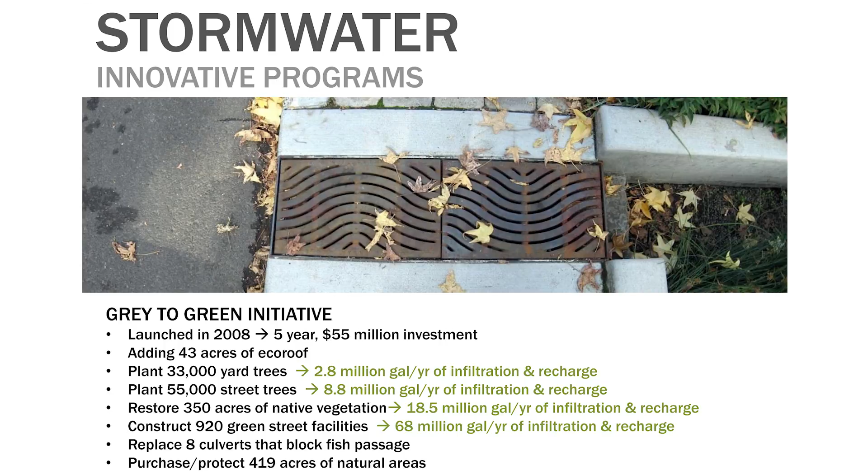Really, there's a Grey to Green program, and there's also a Tabor to the River program. Both of these have been hugely successful about reorienting the way we spend public infrastructure dollars. And the reality is infrastructure is becoming sexy, right? We're starting to daylight, literally and figuratively, these things that we've just been pushing away.

So now, there's our overflow event. We actually have in the system right at South Waterfront, one of our pipes that overflows into the river is right there. We're getting some of those 4 overflow events each year happening right at that pipe, right next to one of the highest rent districts in Portland.

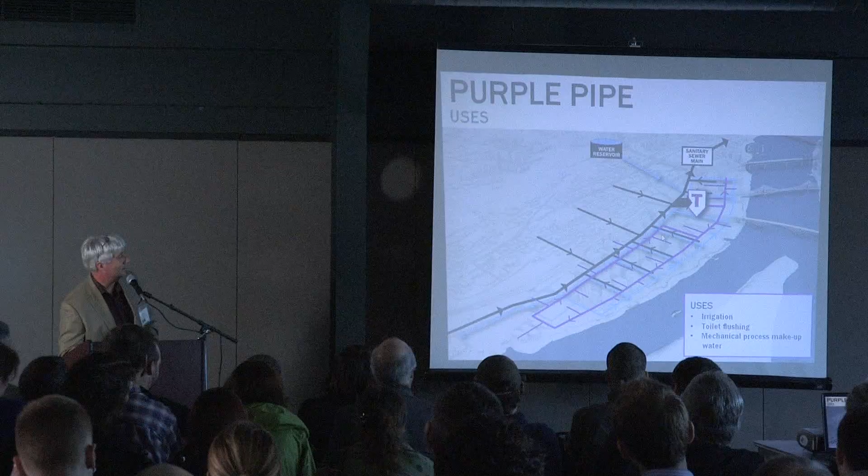So what if we created a purple pipe district? In this district that's under new development, more than 2/3 of it right now is scraped clean. We don't even have all the streets built yet, right? If there was ever a time for us to build new infrastructure, we're good on time. Now is the time.

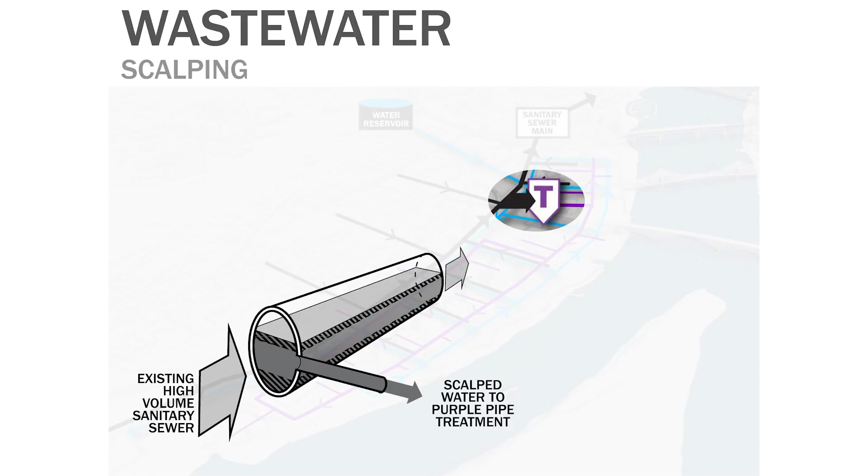So one of the interesting things I've been getting to do on another project is this notion of scalping water. What's interesting is before I had been made aware of this, I'd always imagined that purple pipe systems, even at district scale, needed to create a whole new network of pipes to redirect the sewage into the systems.

Well, it turns out that the sanitary sewer is a really good place to get water to treat. What's interesting is if you actually scalp it in the right place on these very large pipes, you can have the floaters above it and the sinkers below it, use your imagination, and get cleaner water, which costs less to treat. And yet you're still doing really good things about making that system more resilient.

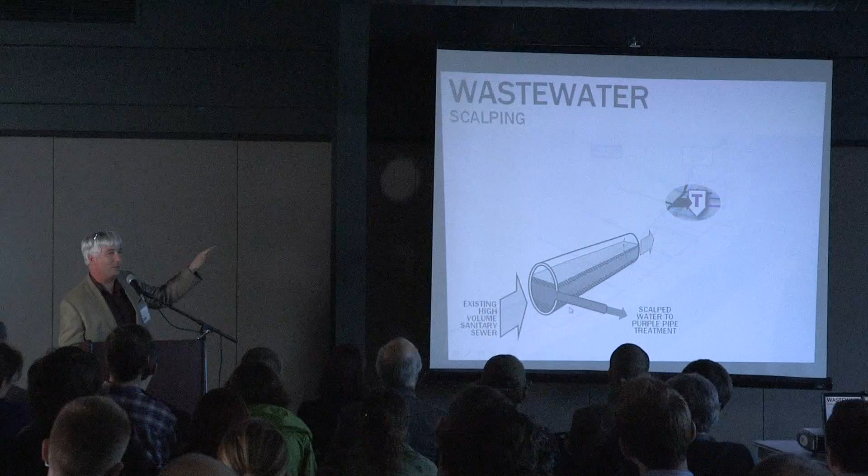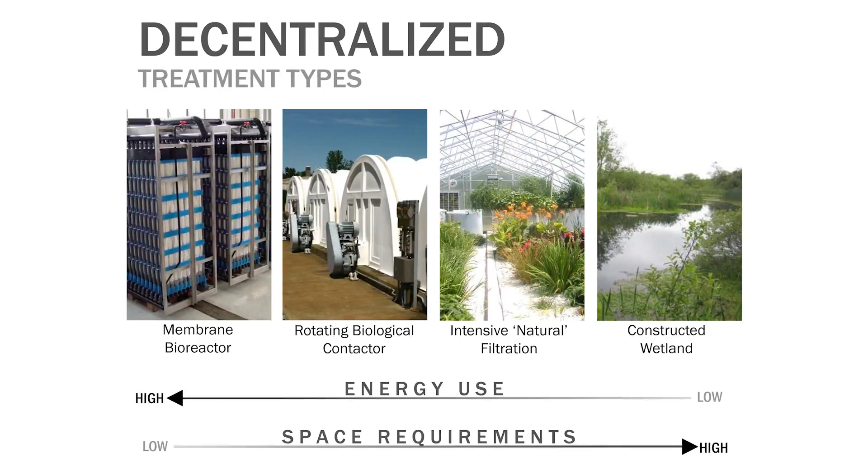So if we scalp that water, there's at least four different ways to treat that water in a decentralized manner right in that neighborhood. And there's a direct inverse proportion between energy inputs on these water treatment systems and area of land required. So depending on where you are, you could pick any of these systems and still effectively start to create these mitigation mechanisms. There's no right or wrong answer.

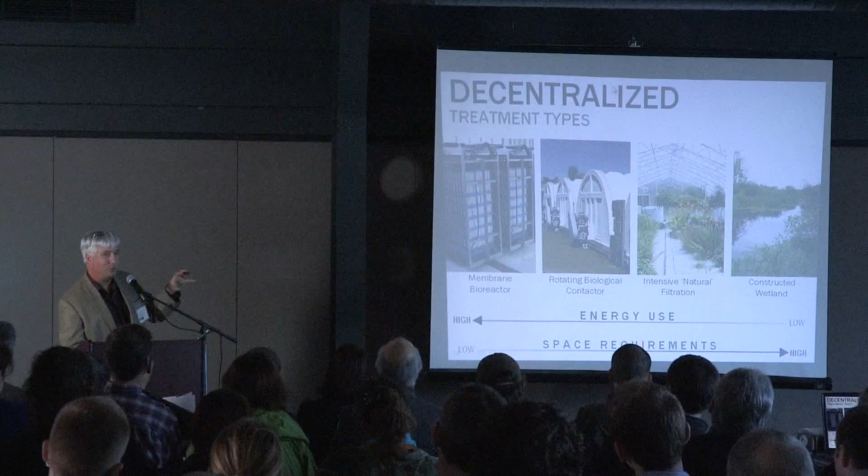I can tell you the membrane bioreactor, we have one of these in Portland in one of those high rises in South Waterfront. It uses a lot of energy. We're only going to use membrane bioreactors in places, I think, in the future where we really need to mitigate sewage in some way, and we're willing to pay a big energy penalty. The constructed wetlands and the natural filtration systems like living machines or eco machines are much lower energy.

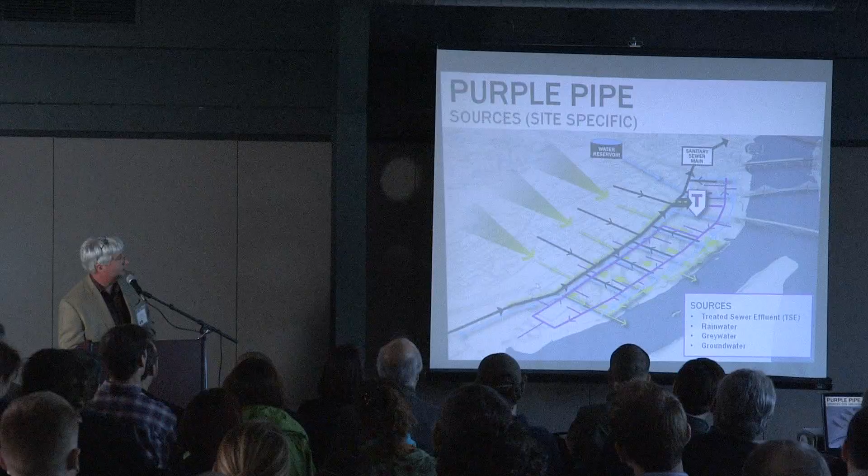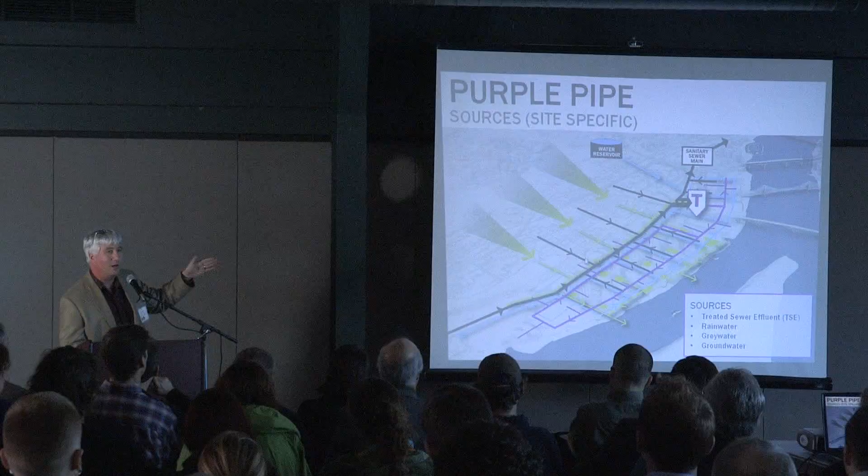So once you do this, you can really start to see how we're connected right to that big pipe system. So we're mitigating the big pipe that we just paid $1.4 billion for right where it makes the biggest impact. Well, what if we did 4 of these? Because we actually have 4 different districts in Portland that are all up for redevelopment right now, all with open land, all right next to the big pipe.

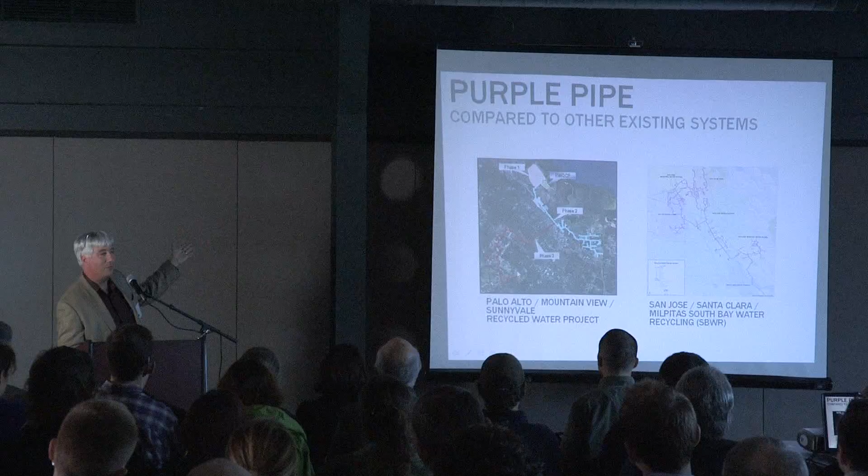But if you're wondering if other people have done this, this is the Palo Alto system. Palo Alto and Mountain View teamed up at the scale of 2 cities and created a purple pipe district. It's an 11-inch pressurized purple pipeline that's taking water from the Palo Alto wastewater treatment plant and pushing it back to the cities for reclaimed use.

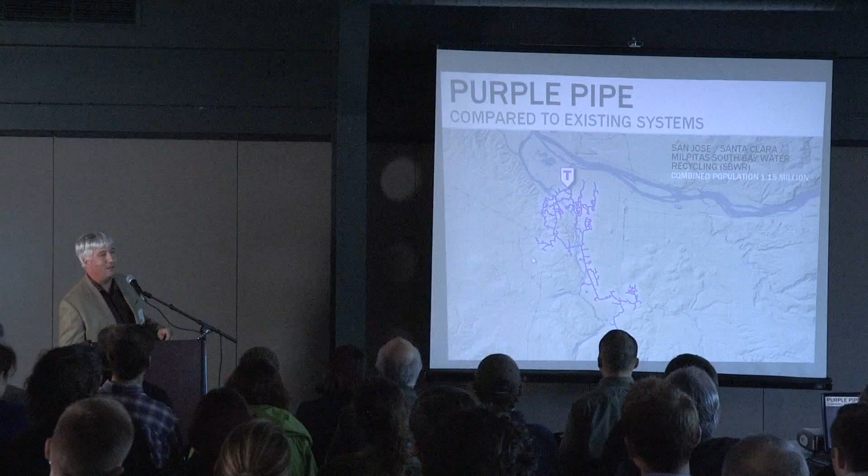Now, I would argue that they may not have done their calculus around what scale systems optimize. The amount of carbon they're using to actually push this purple water around at a scale this big that they may have overshot, in my opinion, without having done any math. But I still think it's interesting, and they've got a much bigger water problem in South Bay than we do. So it may make sense for them.

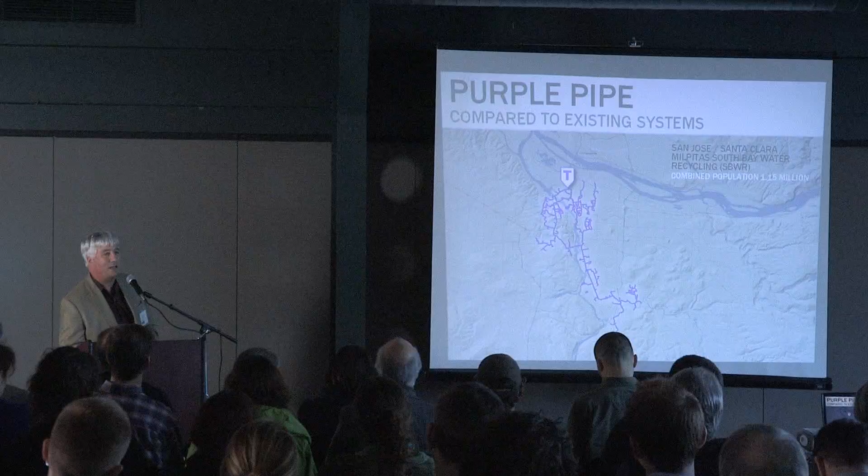But I want us all to be thinking about these kinds of systems as we tear our streets up and imagine tomorrow's infrastructure. We need to do it a different way. So that's it.